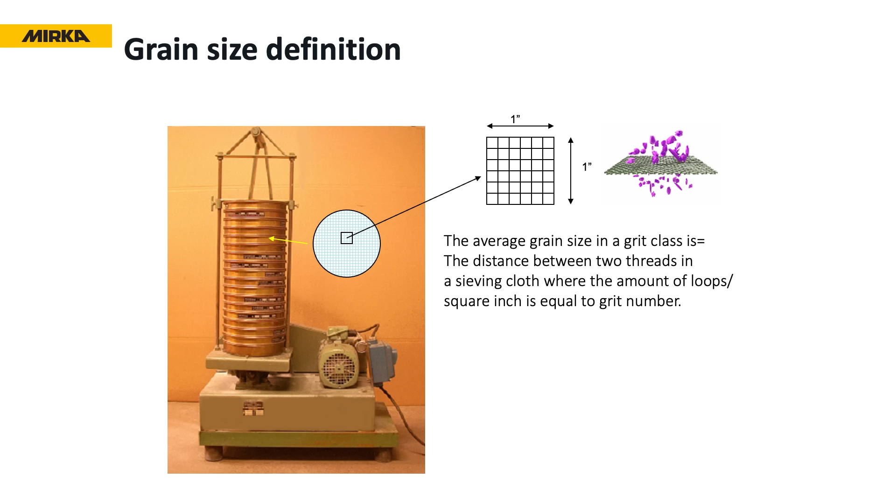So here's just a picture of a sedimentation machine or a sieving machine. This is a Jurassic machine, it's old, but well. We're old, but Jurassic too, right?

Exactly. So within this machine, you can have different sizes of filters, and for example, on the top, you can have 400, 320, 240, and so on. So it goes through and picks out the grains. Yes. And the grains that fall through, for example, a P400 filter, are the size of 400. Good. So that picture I drew really badly on the previous video is making a lot more sense now.

So per inch squared, P400 would have 400 strands one way, 400 strands the other way. The size in the mesh or the filter that it makes denotes the size of aggregate that can go through. It basically makes the size of the hole. Yeah, perfect. And then it gets complicated. Keep in mind, this is a very simplified explanation. Yeah, sort of high level, quick. Just to get an idea of it.

Then if we look at the grain size, this is a table that shows the microns. It shows ANSI mesh, the F standard and the P standard of the grain size. So for example, a P400 should have a grain size of about 35 microns. Is there a plus and minus on that, Nicklas? There is a plus and minus. 10%? I cannot tell you an exact number, but for the guys to know, it's not 400 mixed with a lot of 1,000 up to 400 because it all went through the mesh. It is 400 plus or minus, let's say 10, but it's around 35.

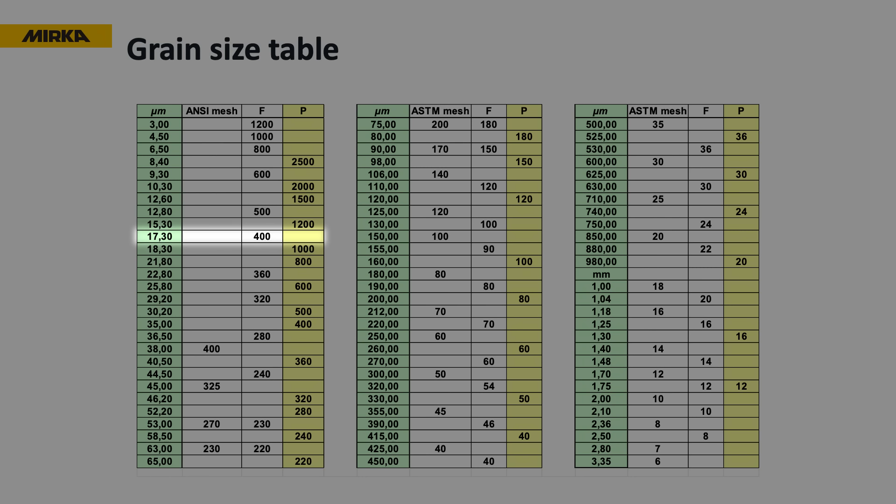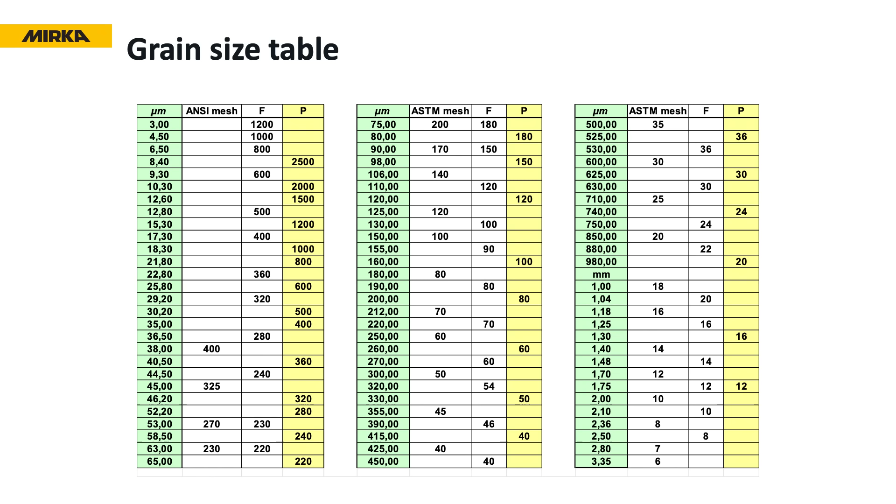So your P is 35 microns, and then you go to your non-P. Yeah, if we take, for example, an F standard, you see it's a big difference in the table here. But if we take a non-P graded product, that means that it doesn't follow this table. It doesn't follow this standard. And P is, can you remind everyone, because it's a governing body, if you like.

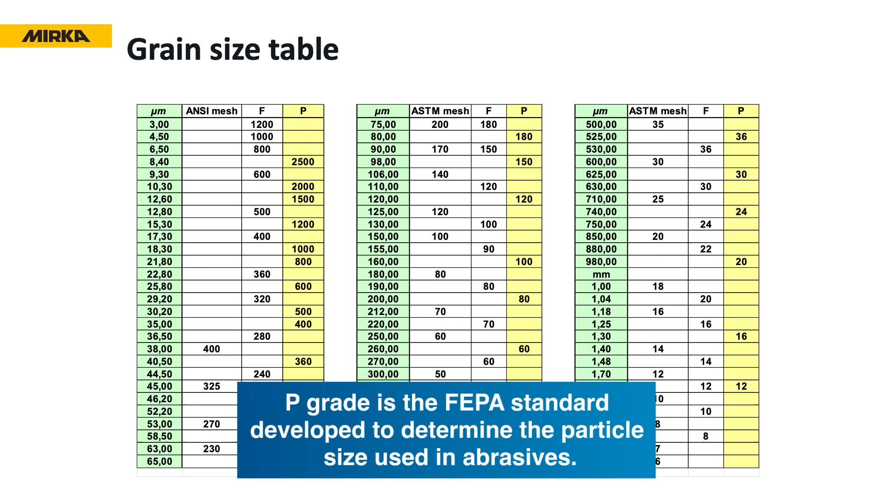The P is a standard that the FEPA organization have. The members of the FEPA organization have agreed that this is the way that we will measure the size of the grains. So I think the well-known brands are a member, but if people are using what I call value engineered papers and there's a P grade on there, you need to make sure that they're a member. If they're not, it doesn't necessarily match this grading. Really complicated, I get that. But if it's a member of that governing body and it's a P grade, you get what you get. The cut is going to be the same. So all of us from retail to professional, P grade we're safe with.

I think the bit we move on to next is the non-P grade, where you might need to use something like this. In the world of superyachts and surveyors, you'll see where they use this piece of equipment to measure scratch profile. It's a bit like a stylus on your record player. If you imagine you've got your scratches here, this moves along and this little arm moves up and down and will measure the depth of the scratch. Exactly. So what we're saying is P doesn't necessarily match a non-P grade, and the scratch profile is different.

And from my point of view, being selfish as the paint manufacturer, if you've got a deep scratch, it can telegraph back through the top coat and look really, really bad. So it's really important to me that the sanding is done correctly. We talked about metallics. Depth of scratch is important. So you're going to see this sometimes, and it's being measured, but it's important to know what it means.

Good. Here I have a surface roughness measurement on a primer, and we have sanded with grit 400 from different abrasive products from different abrasives manufacturers. And guess which one of them here is non-P graded. It says 400 on it.

You're going to put me on the spot. I'm going to say, because this is microns on the graph, right? So I'm saying manufacturer 2 is non-graded because it's a peak. It falls outside of all the other 5. I'm hoping I'm right. Pretty obvious. Yeah. I was right.

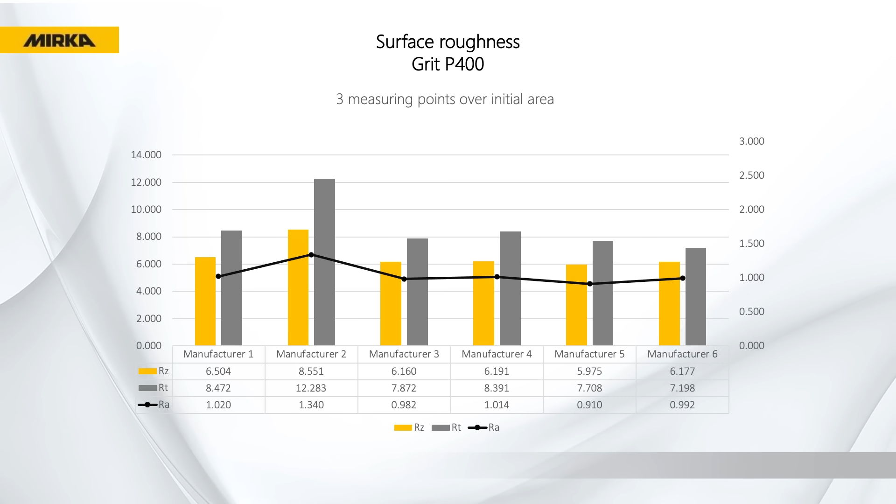You're right. Good. And we measure 3 different measurements here. We have RA, RZ, and RT. And if we jump into RA, that's the roughness average, and basically we measure the peak to valley of the scratch. Okay. And you usually measure a 5 millimeter length. So the probe is traveling 5 millimeter.

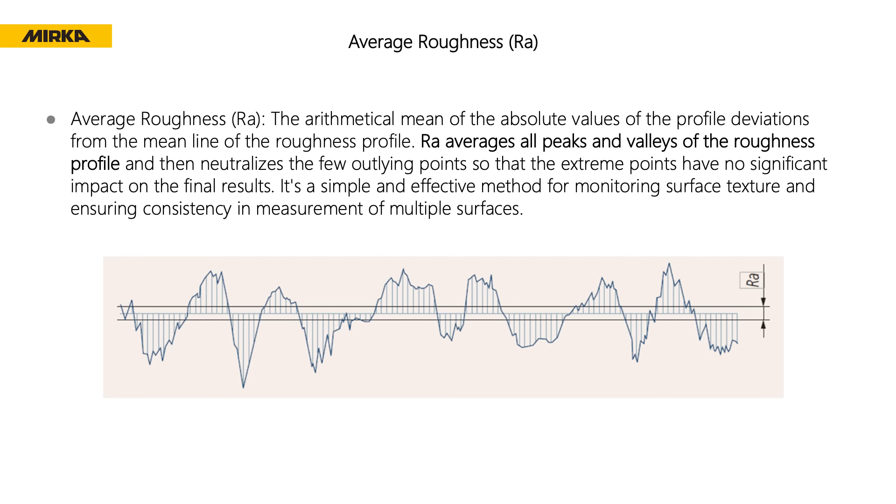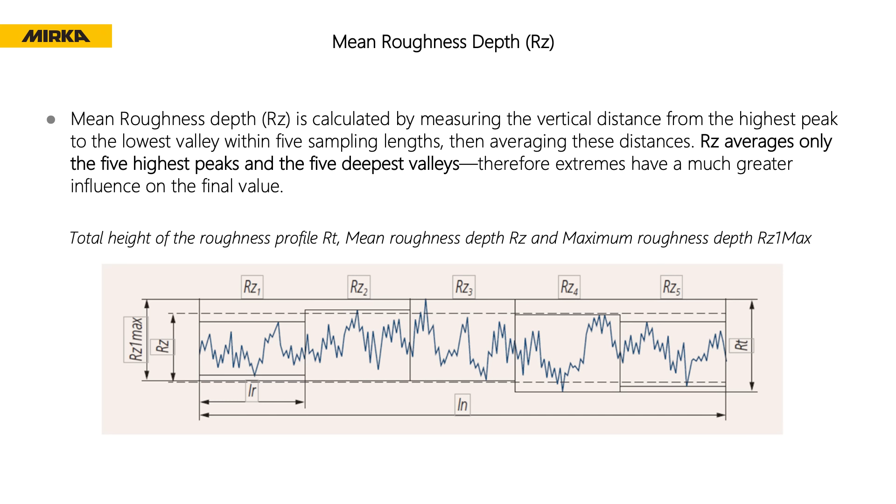You get the profile of the scratches, and then you take the average from peak to valley, and then you get RA. Yep. And the RZ is the most interesting value to look at, because that measures peak to valley divided in 5 different zones, and you take the maximum peak to valley average of the 5 different zones, and then you get a value.

So in the world, and Leo, I know you do this, you're like me, you're out in the field at some of the yards, so the surveyors do this, they're basically measuring the consistency of the scratch profile and the depth when they use this piece of equipment. Yeah. So when we see these people with these pieces of equipment, they're looking at consistency, because, being selfish as a paint manufacturer, it's going to improve my DOI if I've got a good scratch profile.

Even gloss. It can make a difference on gloss, absolutely. Okay. The RZ profile is responsible for the final result with the paint. The more regular the RZ is, the better the value, and the better the final result. You can see it in the different applications.

So, quick question for those of us outside of where there are inspectors using these pieces of equipment. Is there a rough rule of thumb if I use a non-graded paper? So if I picked up a 400 non-graded, I can't use bad language, it's not necessarily the right scratch profile. On a non-graded, is there a safe bet? Do I finish with a different grade over the top to be safe, or?